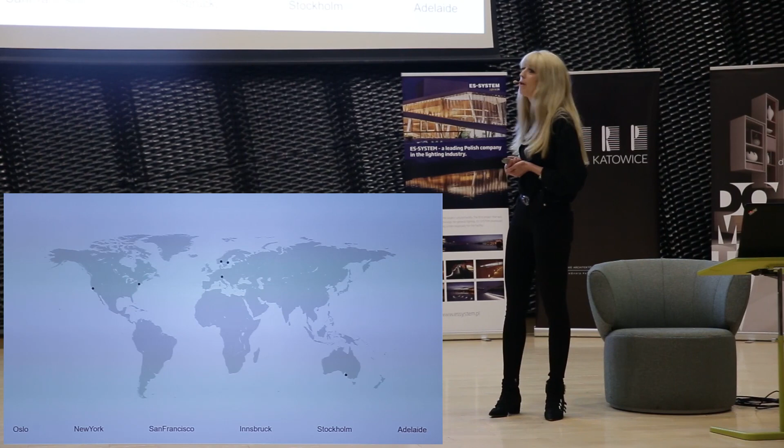Here you see an overview of our offices. It started in Oslo, and then it moved over to New York with a project we won there. I also forgot the Stockholm office - that's a smaller one we also have.

Generosity is a very important part and value within all our work, meaning it also means a lot for our work culture - the sharing of knowledge, not keeping it for ourselves. That's the main force when we work with teams on our projects. This joy of sharing is very important, and hopefully it's reflected within our projects, generating a specific generosity in the built, final result.

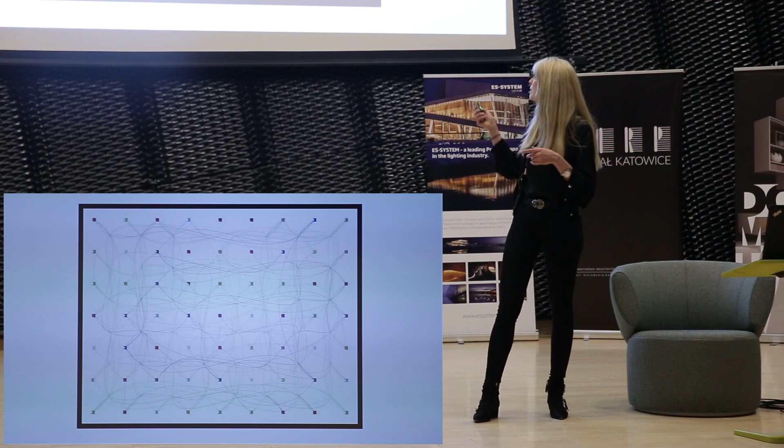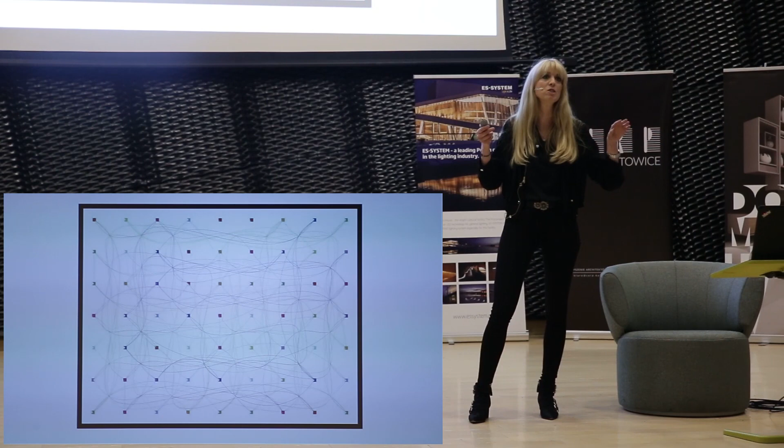This is a classic open floor office. But what we did is not organize ourselves within projects, because we think when different project managers and members are spread within the area, on your way to your next office member - say, if you're part of the 'yellow' project, just as a symbol - you'll get a lot of information on your way to your next project member. That means we maintain a continuous level of shared information within this kind of structural approach.

Transpositioning: within our transdisciplinary approach, we have developed our own work method. It started internally, since we have all the disciplines in-house, and also invited others. It's a method where we encourage each other to leave the profession itself, but bring everything related to your personal interest to the table, communicating the different aspects in a project's development at the very start, sharing this information to bring the whole picture early on, to have this holistic approach.

And to swap professions - we encourage the architect to become a client, the client to become the landscape architect, and so on - to just leave the limited box and the direction of your professional view.

Idea Work, the method of transpositioning—we have kind of rationalized our internal method. We were part of a research project initiated by the Norwegian research facility called Idea Work, where within a series of years we were observed together with other innovative companies, to identify generic drivers within the industry that form a generic framework for innovation. We post-rationalized our method through that research project, and identified specific elements that have to be present for Snøhetta to be at its best, meaning we come into this innovative direction.

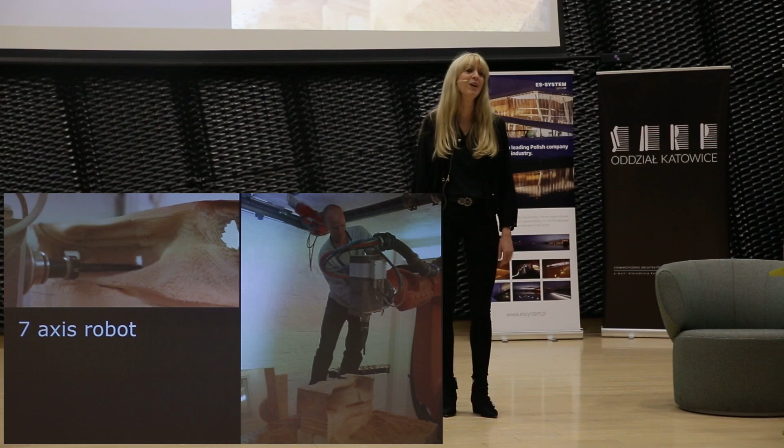We're in the lucky position that we also have this 7-axis robot. We bought it when we actually didn't have the money to buy it, but now we are very happy that we did so.

We were able to summarize our method, processes, people, and the way we work in the exhibition we had at the Danish Architectural Center in 2005, I think it was. We called it People, Process, Projects, because it starts with the people, and the processes generated through the people then lead to the project—the physical result of the former steps.

We also created a small workshop area, a work-in-process space where you were able to have this touch-and-feel experience, looking into several work-in-process situations. And then we have this classical display room where we had a display of all finished and ongoing projects, including models and one-to-one mock-ups.

So how does this generosity aspect lead, how is that reflected in our projects? Of course, the most prominent example for this, I would always say, is the opera. You might have heard about the Opera House, and before I go into the more detailed architectural aspects, I think it's very important to take one step back and reflect on where this approach actually comes from.

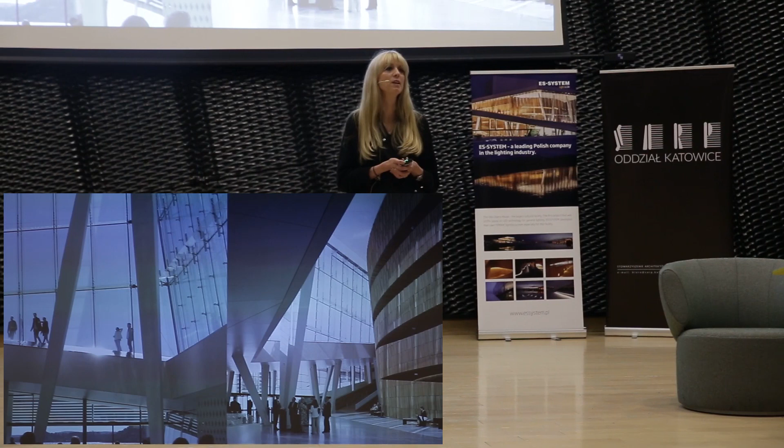So this is actually an interior public space, and this is something we find quite crucial, especially in our climate. If we're talking about public space, it's not enough to talk about outside public space. You see the wooden wall—that's a bit of a transition between the more protected opera performance area and the world, or the city of Oslo.

So we use the reference of the tree—you see the roughness on the outside of the tree, and the more you get into the core of the project, the main performance space, the tree surface gets more and more refined.

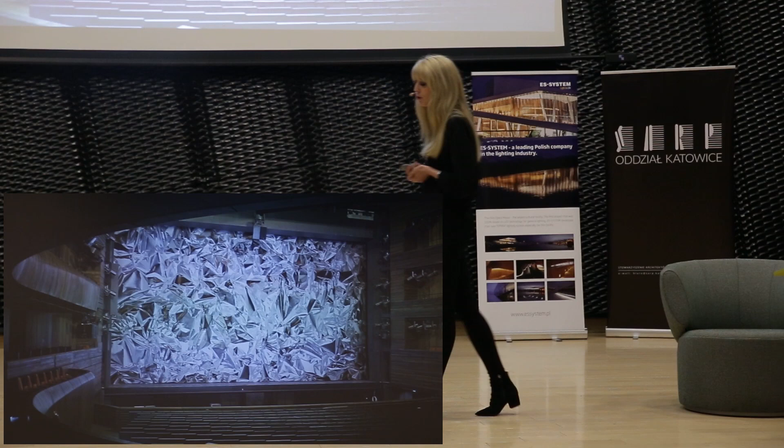This is the main performance hall, called the Store Sal in Norwegian. It has 1,400 seats, and it still has, I think, an unbeaten level of technology—I haven't heard otherwise. The opera was opened in 2008, so I think it's still at the edge of technology and acoustical aspects. The opera also has a lot of art projects integrated.

I don't know how it is in Poland, but in Norway, 1% of all public project budgets goes into art. So the scene carpet was an art project by an artist called Pae, and it looks like aluminum, but it's actually a fabric, a woven structure. The opera roof was also an art project—we actively involved three artists in creating these different surfaces.

And again, it's all about the future generation. I think in terms of accessibility, we also try to include the whole range, and that's more the Norwegian style—that's where we actually come from. And I think the opera is at its best when...

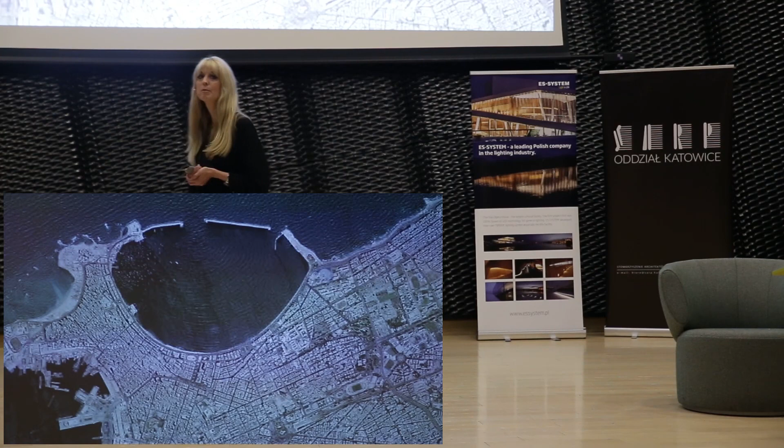A step back in time, I'll take you to Egypt, to Alexandria. This was actually our first project, an open competition that we won at the end of the 80s, for the public library in Alexandria. Funny enough, 80 of the 524 entries were pyramids.

Conceptually, that was a little funny approach, if you think of the Louvre in Paris, where there was something with pyramids at this time. But we tried something completely different, which illustrates our conceptual approach well, because all our projects are born out of site-specific conditions, transferring that into in situ concepts. So our projects are content-driven, not style-driven, which avoids generic formalism.

For the Alexandria Library, it started with a very simple line, a line crossing the horizon. From this simple initial idea, it was easy to evolve further. For our library, this line could also mean the line in time: everything underground has to do with the past, everything above ground is the future, and where the line intersects the horizon, that's the true presence. We used that timeline to allocate the program.

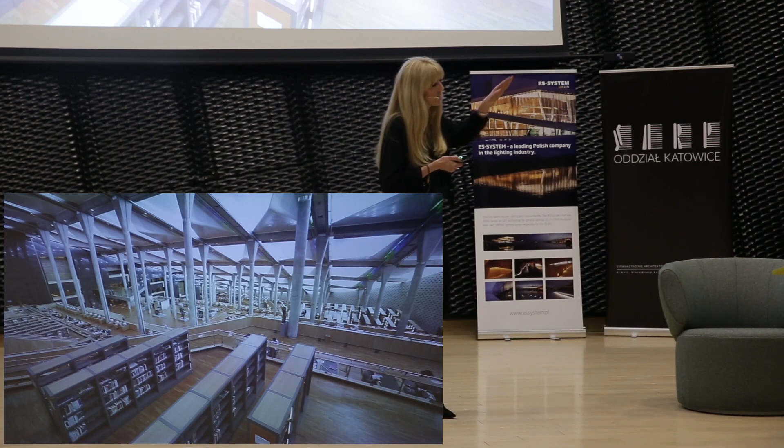Here you see the open reading room, still I think the largest of its kind, around 36,000 square meters, arranged like a vineyard with several terraces underground. Then we had the facade facing Alexandria, the old town.

We worked very actively with artists here. The whole facade represents all the different languages of the world, and we worked with local craftsmanship, combining traditional craftsmanship with high-technology knowledge in a transdisciplinary approach, which led to surprising results.

We were very touched when we got images from the library's director during the Arab Spring, when there was fear the library could be damaged by demonstrations. Instead, people built a human ring around the building. That makes you think that if you put real value and public ownership into a built situation or architecture, it helps maintain that public value and the architecture itself.

This is also reflected in the refurbishment of Times Square, which we did through our New York office, transforming a heavily trafficked situation into a public plaza. We recently started post-occupancy studies, looking at the number of accidents, a kind of post-rationalization. We always have our own research going on, following our projects after we've handed them to clients, especially our public projects.

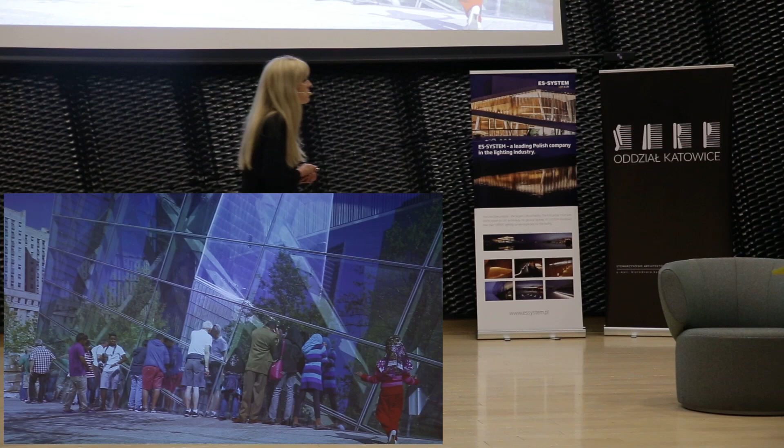What was important for us was to create a situation where everyone could bring their own history to the site, and through self-reflection within the context, link it to their personal history, but also to the history of New Yorkers and the site itself. So we aimed to create a sheltered environment, the only horizontal building in a way, while still allowing for this interaction.

I will show you now a project that we have built in Canada, in Toronto, and I think it's also a very interesting approach in terms of interior public space. It's called the Ryerson University Learning Center in Toronto, and it's basically an informal study center for students.

The reason for this building was that there was a lack of study space in Toronto. All the students lived in very tiny flats, and the study spaces, rehearsal rooms and libraries were very limited. So this building's only purpose is to give students free space for unprogrammed self-study and learning. We tried to use references from a landscape, also within the belief that different physical conditions can create differentiation in learning conditions and behavior.

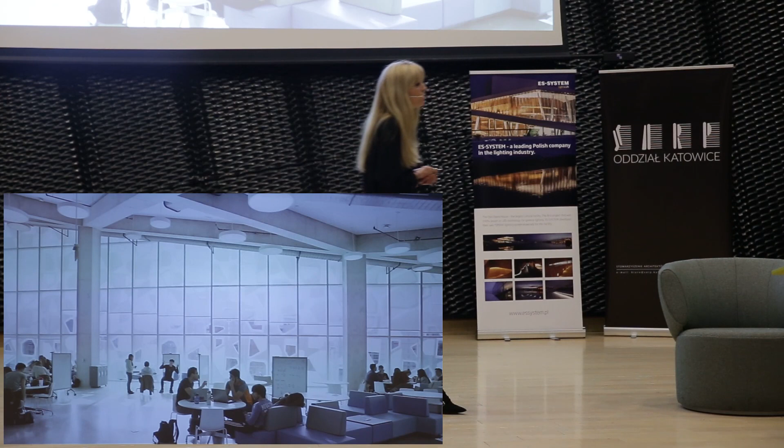If you think about the old Greek spaces, the real exchange of knowledge and cultural development happened within communication with others, nothing that you can just read, you have to experience it yourself. That's what we tried to create this environment for, to base it on that philosophic tradition of exchange.

Another project I want to present in terms of public space, more than on a museum aspect, is the SF MOMA Extension that was completed just a few years ago. The starting point for this project was a building by Mario Botta, an architect who might be well known to you. Our task was to extend the museum with additional exhibition space.

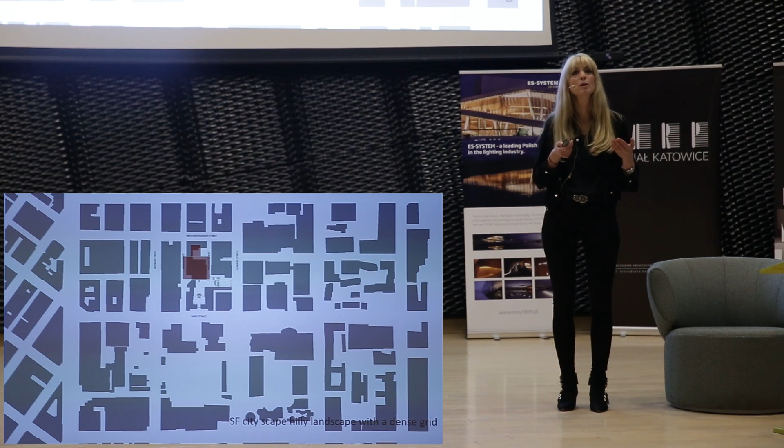But we thought it was also very important to make this new extension increase the accessibility within the urban fabric, because San Francisco has quite unclear directions in a way, and we hoped that our building would help generate another type of accessibility. So we formed it very much based on the urban grid, and created and extended the number of entrance and accessibility points, going more in dialogue with the city context.

We also introduced additional program like free galleries without ticketing, free Wi-Fi, so that it's also included in the public area in a way. So again, the topic of interior public spaces is on our agenda, and we actively address it in all our projects, also to increase the consciousness of our clients in this way.

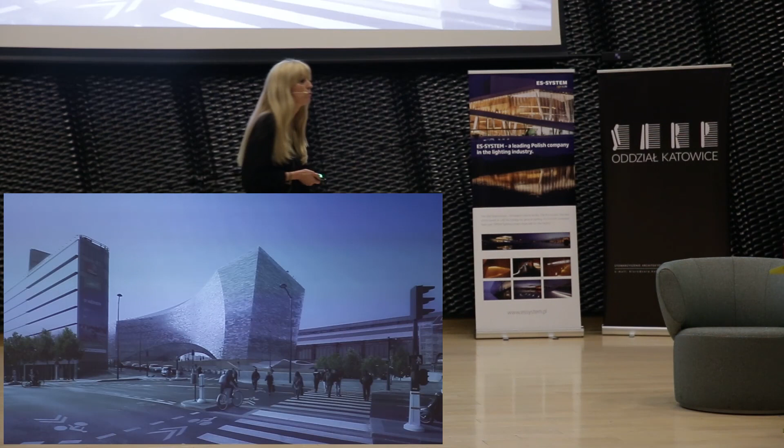Another project we have currently on our drawing table is the new headquarters for Le Monde in Paris. You might know that Le Monde has an outstanding reputation within the world of news. It's maybe the newspaper with the highest reputation, at least in Europe.

That was an invited competition that we won. Our basic approach was to create a bridge for this site, because originally the project, or the site, was divided in two, and the regulation only allowed for two independent situations. But we thought it was very important to create an architecture that also had a symbolic effect, like Le Monde and the building as a bridge between Le Monde and the world.

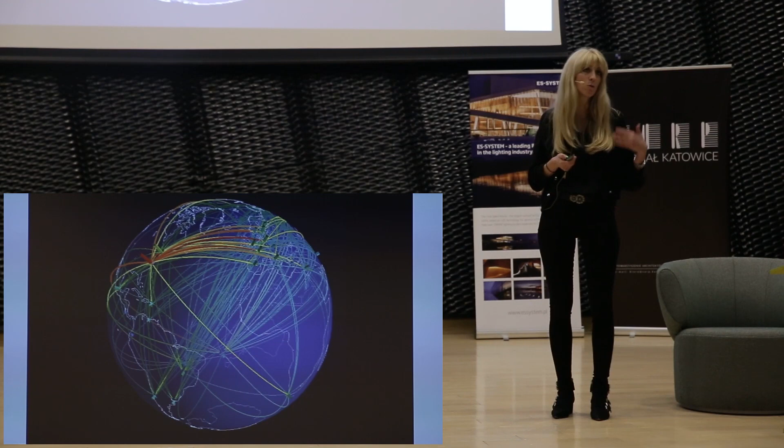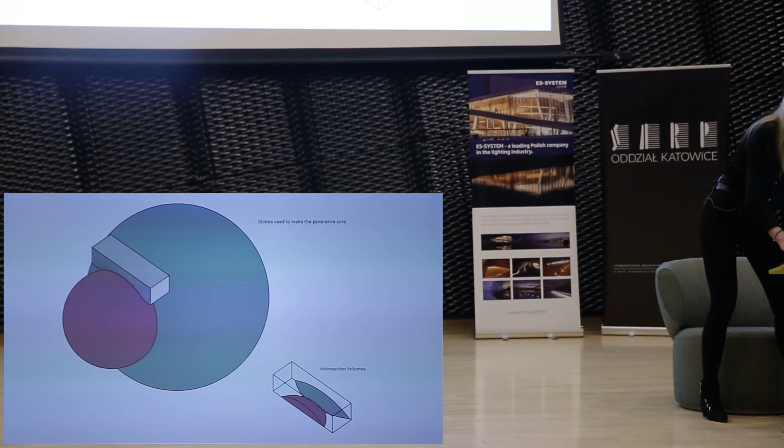So we used this kind of metaphor actively when we worked with the site. I need a little water, but I can speak while filling it.

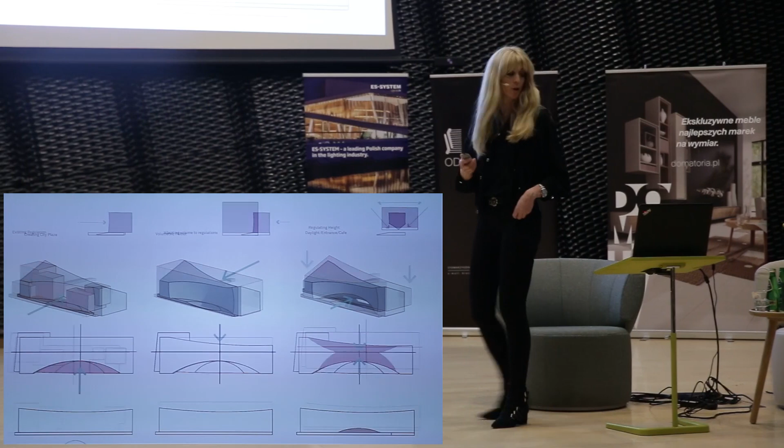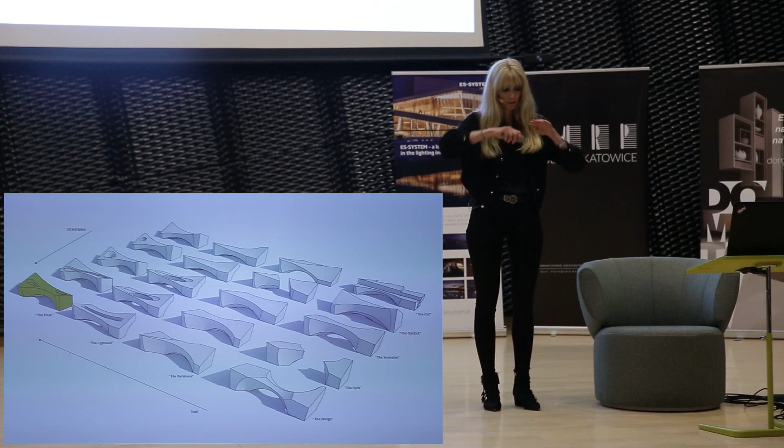We showed, within a series of interventions, that by relocating masses, we create in a way the same volume, but managed to create this bridging effect. That's also reflected within the materiality of the building. We wanted to create this pixelated effect, like the kind of news and the level and complexity of information that Le Monde also represents. You can see it here from the plan.

As you can see here, it has two kinds of entrance situations. And also, we introduced here some public interior program, like a gallery space and an information center.

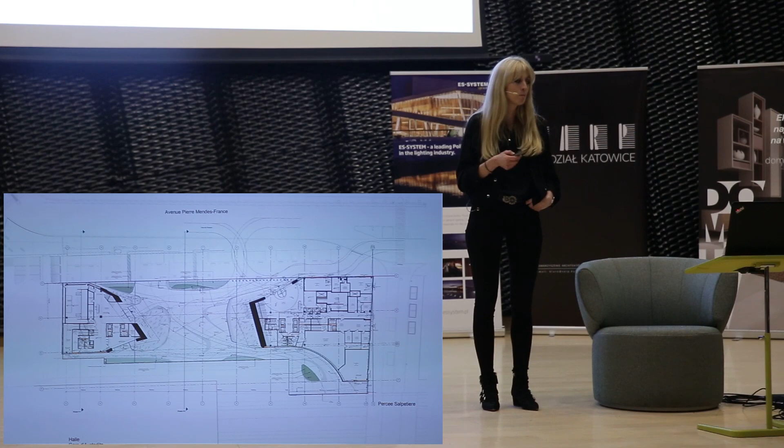Le Monde was really brave because of the situation in France that you all know about, where they could have increased their level of security. But they stuck to their original concept to allow us to have this vulnerable program on the ground level, which allowed people to go into the building, but also increased the potential of attack. Still, we were able to develop and refine the program as we had proposed, and that was also one of the reasons why we won the competition.

So you can see here the stomach, this kind of bridging, the materiality where we have a light installation that we can program, which also has something to do with the news and the speed of information. And here I brought you a facade section, because it's actually a very simple facade solution.

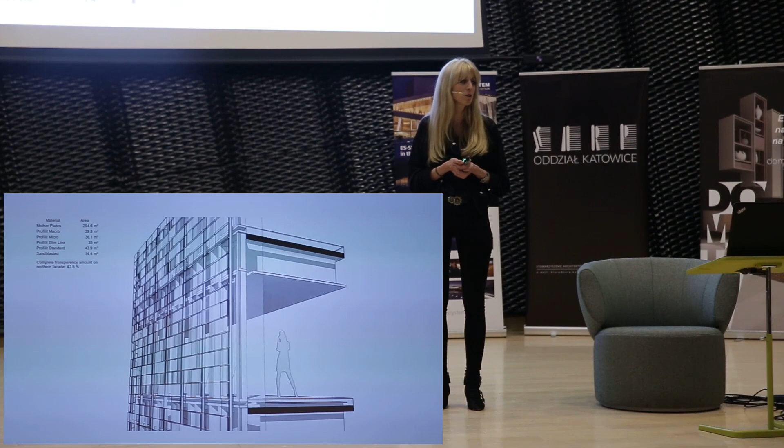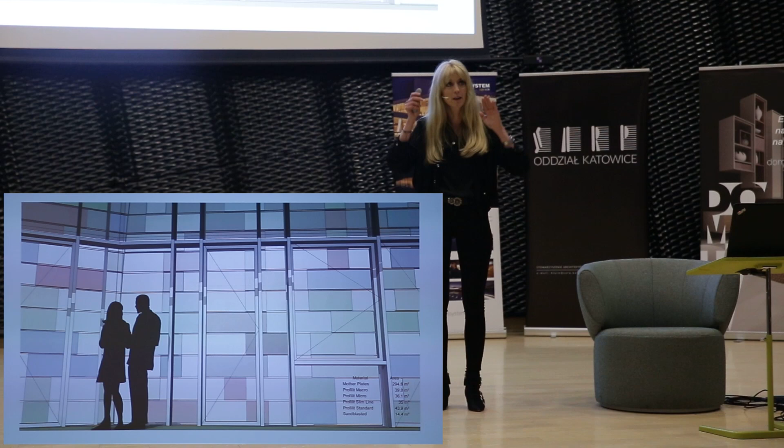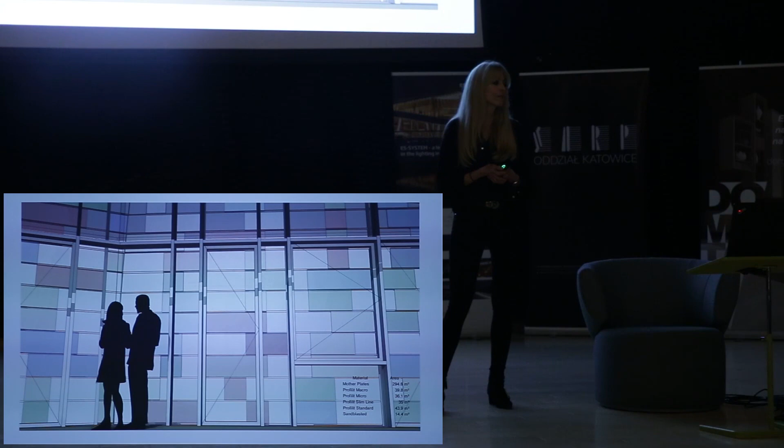We worked with different layers of glass and transparency on a very basic structural approach, with a series of repetitive formats in a way, but it still required quite some high technical skills in terms of modeling, including 3D modeling. So here you see some images of the public situation, the entrance.

Rapid prototyping. As I introduced to you in the very beginning, the workshop method is very important for us when we develop form in our projects.

So I will show you one project that we were commissioned to do for the Reindeer Association in Norway. We are again at the mountain Snøhetta. The task was to create a small observation pavilion to be able to observe wildlife.

Very basic commission. So these are the kinds of objects that we are looking at, and it also brings us back to our area where we have our annual conversation.

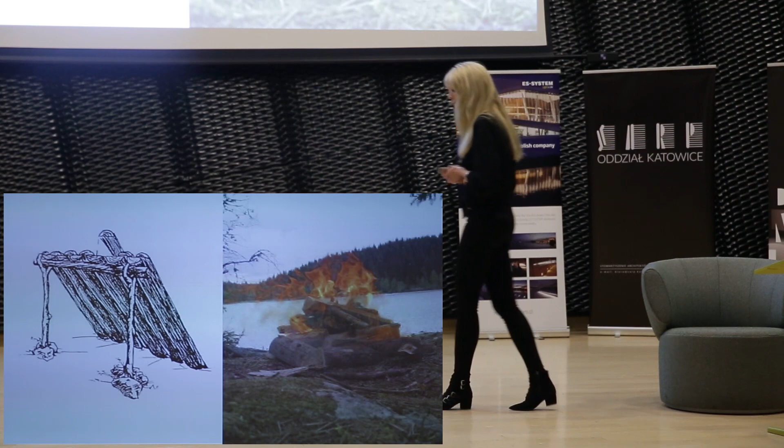When we go into a task like this, we always carefully make an analysis of the local context. What are the typical materials? What is the topography? What are the cultural and political aspects of a site? Here it was very clear for us that we have to work with how humans inhabit nature.

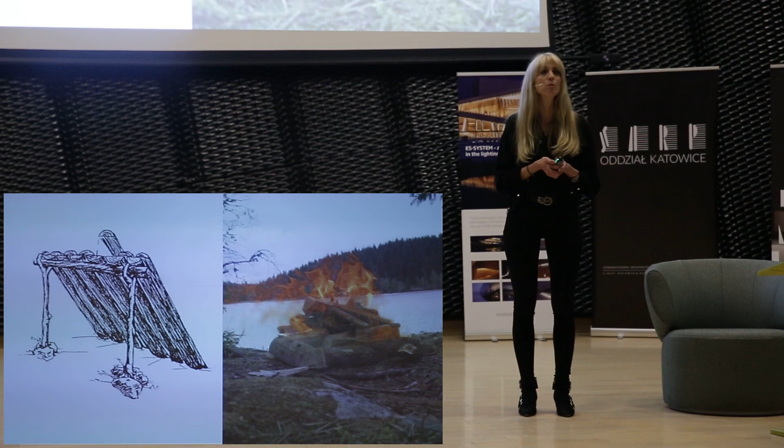This is a small gapahuk that you can see on the left. It's a shelter for hunting in Norway, a very, very old, simple structure, and then of course the bonfire.

So we have this kind of long-standing and preferred collaborations, and then the interior was shipped on a truck and installed on site.

We call this building, and a whole series like it, keyless structures, because it's basically a public building. It's open 24 hours, and you can go there with your family and friends, and even stay overnight. No one will throw you out.

As Snøhetta, we also gather there before we go to the mountain, having a small conversation. So I think this also reflects very well the way we work.

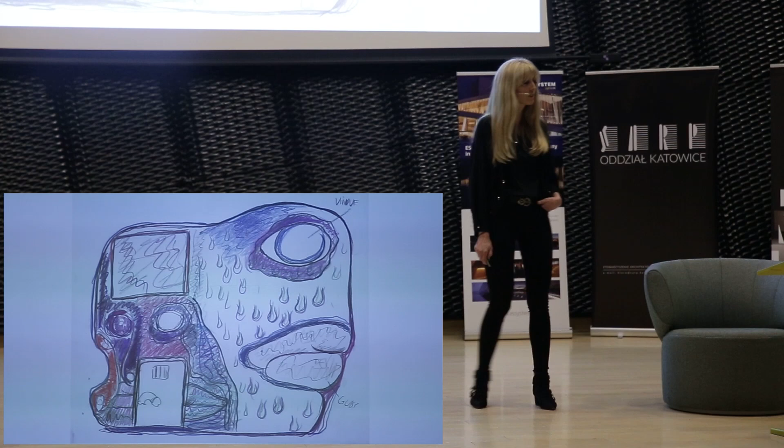Together with him, we got the task of creating a so-called house to die in - a single family house for this artist. The process was very interesting because we worked very closely together with him, and you can see here some of his sketches.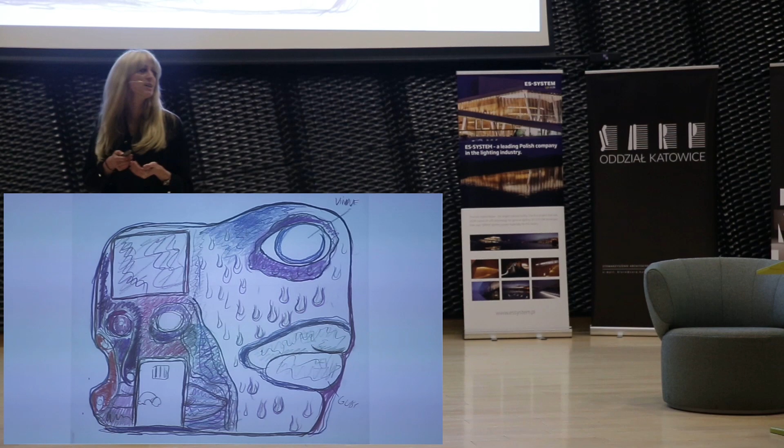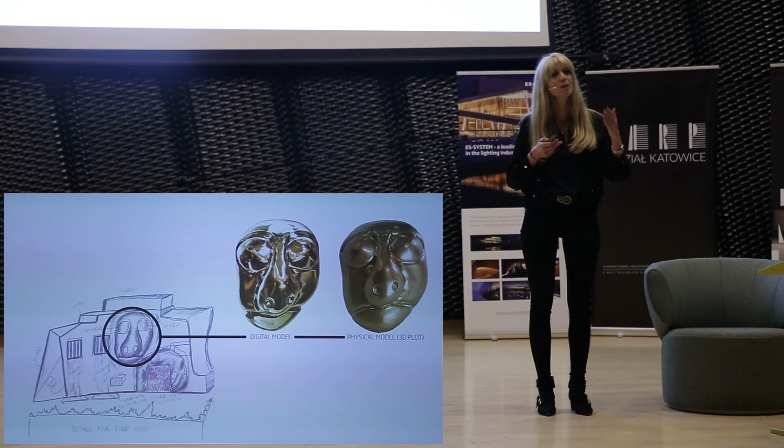And we tried to transfer these sketches, and that's also reflected in the way he works, to try to transform it into a three-dimensional space. So it was much about scanning and also modeling. This very literal co-creation process also led to a very unconventional result.

So this is actually what it will look like. And of course it has created a lot of discussion in Oslo, because this site is very close to the former atelier of the famous Norwegian artist Edvard Munch. Strangely enough, within that area there are a lot of artists living, so they raised really protest campaigns against this building.

This discussion has been ongoing for years, but we are quite optimistic that we will manage to realize this building. It's an experiment, of course, but it's at the edge of a kind of collaboration process in a way.

So here you can see our way of experimenting with the facade. We used an old Japanese tradition to burn the outer layer of the wood, because that gives you weather protection. And we were also able to exhibit a one-to-one mock-up at the ICA in London with an exhibition of the process. So also a very interesting, very baroque approach in a way.

Knowledge-based intuition - that's a very important one of our creative drivers, and we encourage ourselves to constantly rethink and redevelop our method. I will show you this with an example that we developed after we won an invited competition in 2007 for the King Abdulaziz Center for World Culture.

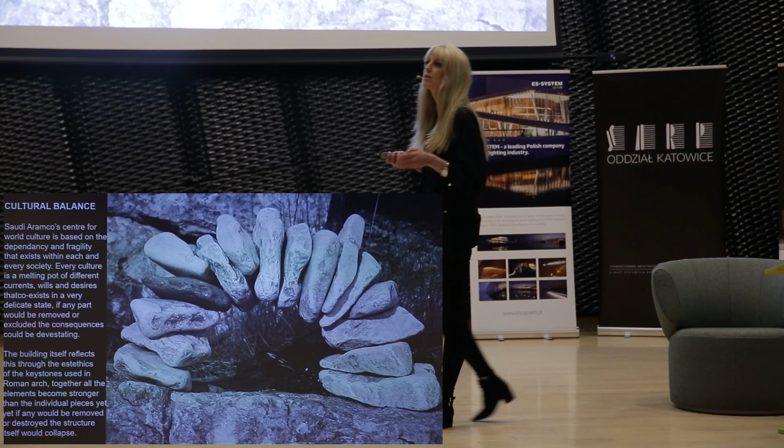Our entrance and conceptual approach for this project was to think about it as a kind of composition of elements that are dependent on each other, to show that culture has this interactive approach - like a Roman arch, where you can't remove one of the stones because then the whole composition will fall apart. That's also kind of how we see culture, as the keystone in society, and that's where we located one part of the program.

As you can see here, the core of the project was the keystone, and at first we had the children's center there because that has something to do with the future. We also used the timeline - past, present, future - for this project, and that has to do with the programming. So we took everything that has to do with history and museum underground, and the educational parts were located at the highest point of the building.

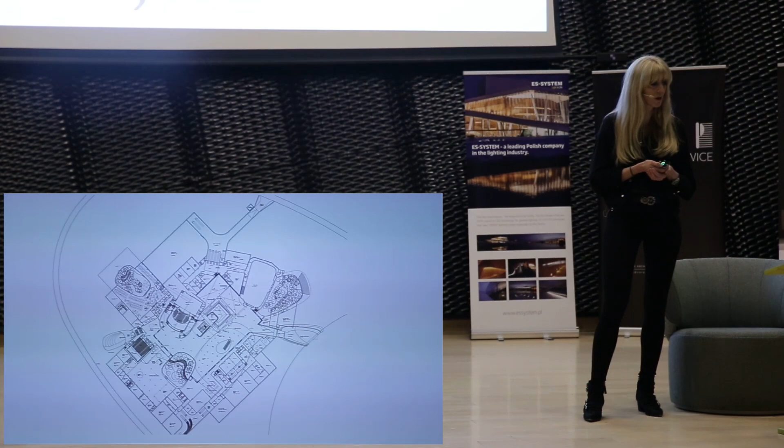So here you see the rendering from the composition and a bit of the build-up of the project from outside. And here you see the ground floor - it's a super complex program. What we created here was a kind of interior plaza where we had the entrances for the different cultural programs, like the auditorium, library, museum, and so on.

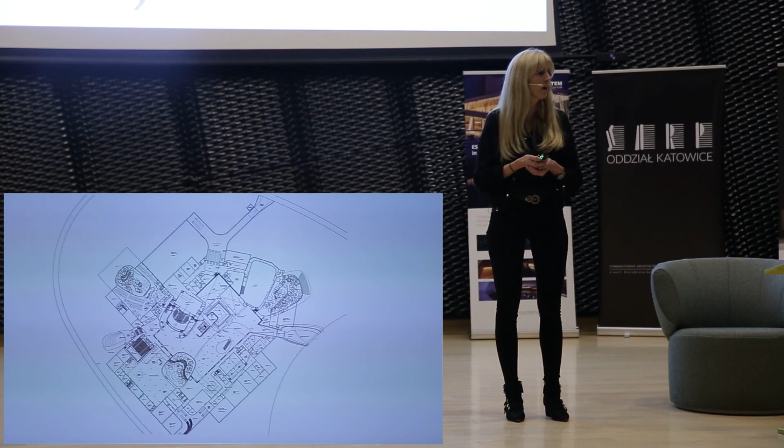This image shows very well how, when you have a strong initial concept, it's so easy - or not so easy - but there's a certain logic within it, when you agree upon a concept, for how you can refine and develop the different layers of an architecture. So here was a discussion about the facade, and we started with the keystones, then made an analysis of how the lines run around the stone, and that led us to a very natural flow of how we developed the facade.

And here you see the one-to-one mock-up. It's actually steel pipes that are mounted around the different volumes, with a 5 centimeter diameter. We also had a mock-up in front of our own office, just to experience the physical presence of that solution.

A lot of these programs also do not require daylight, so in situations where we wanted daylight, we just squeezed the pipes so they had a kind of flattened diameter, and then they transitioned again to a circular format. So here you see it from the building side.

That project was really an adventure. I was also part of that, and I haven't ever, and maybe will not ever, experience a project like that. It was a fantastic journey, together with the client, sticking to the original concept and being true to the agreements made along the path.

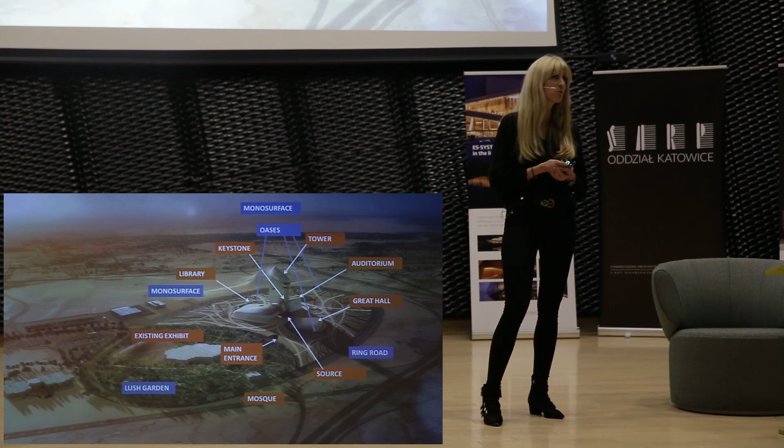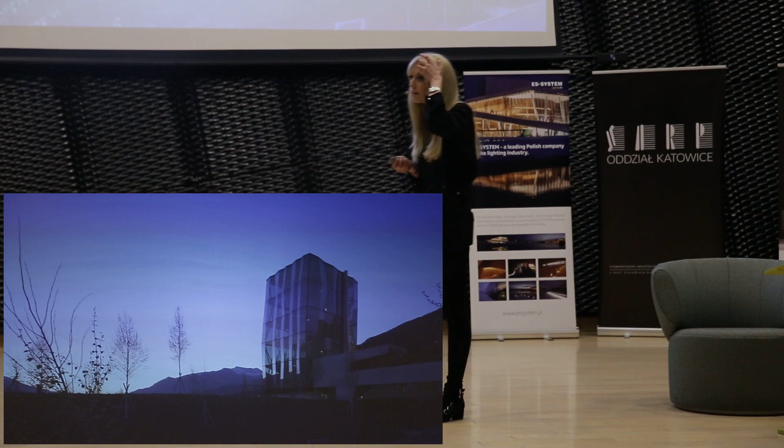So here you see it as it was, and also I think what's important when you have a very strong concept, and you put knowledge and energy into developing this very important phase, that's reflected in most of our projects. The built result is very similar to the conceptual or competition proposal, the very first conceptual design. Another project we built in Austria was also the start for our office in Innsbruck.

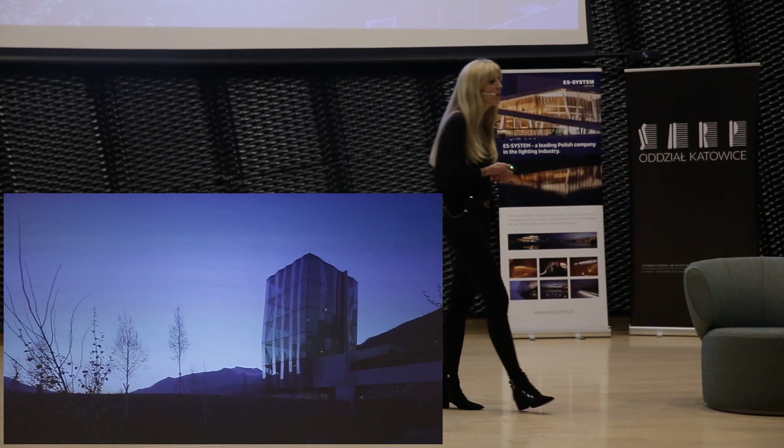They are about 30 people now there. That was part of the Swarovski area, and it is a vertical play tower, so there was a little bit of experimenting with the field, an indoor-outdoor situation for children. We work very closely with Swarovski.

You might know these small crystallines - they have this jewelry, but also these crystalline small animals and stuff. So we worked very closely with them to create a pattern and a frit, and also for the interior, looked at the surroundings and used the colors of the surrounding nature as a basis for our interior development, also having a customized approach within a typology that didn't exist before.

We also had to go through all the regulation - in Germany and Austria you have this TÜV and all the stamps in terms of security, but we managed to go through all these stages as well. And it also has a nice cafe situation and so on.

The continuous state of reinvention that we put ourselves in - you could say it's a little bit of being in a constant process, that we're not reproducing our ideas, but it also means you have to always ask yourself and reflect very carefully if you're on the right path, and also stick to your method.

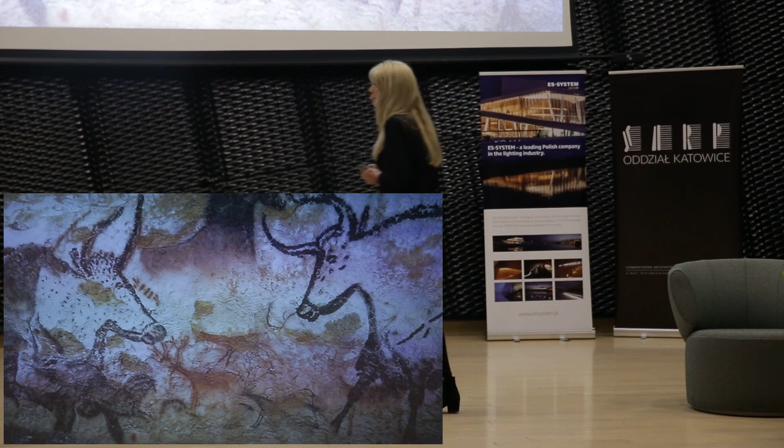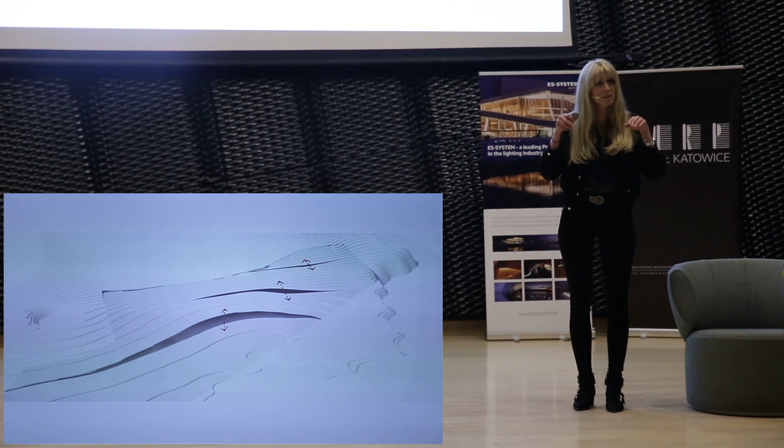In the end of the 80s, one made the decision that there should be a visitor center, and it took some decades before that was put into action, but it resulted in a competition that we won. We tried very carefully, because there was a lot of program - it's about caves, it's underground, so how do you deal with the situation? We tried to create an approach where we only made small incisions within the landscape, so it's more building landscape than architecture in a way.

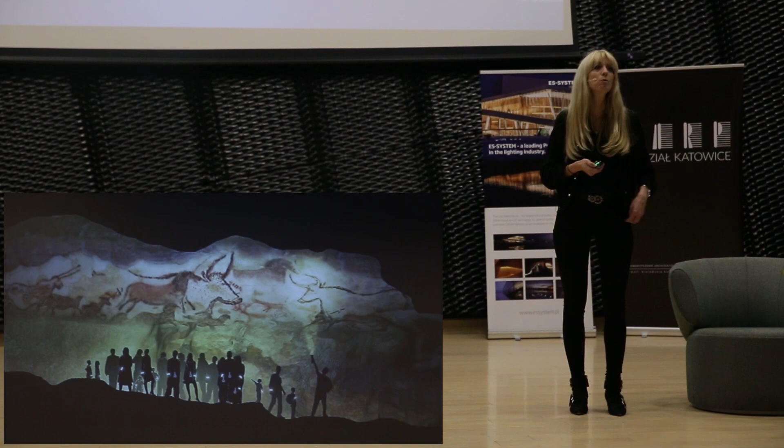So here you see some of the competition renderings, because a very interesting part of the program was a replica of the existing cave. That required a process that is really unbelievable - it was the total scanning of the existing cave and then reproducing it to an accessible part of the visitor center, to really experience one-to-one how it is to be in a cave. So we created different sequences - this is still from the competition, so it's also part of a digital display.

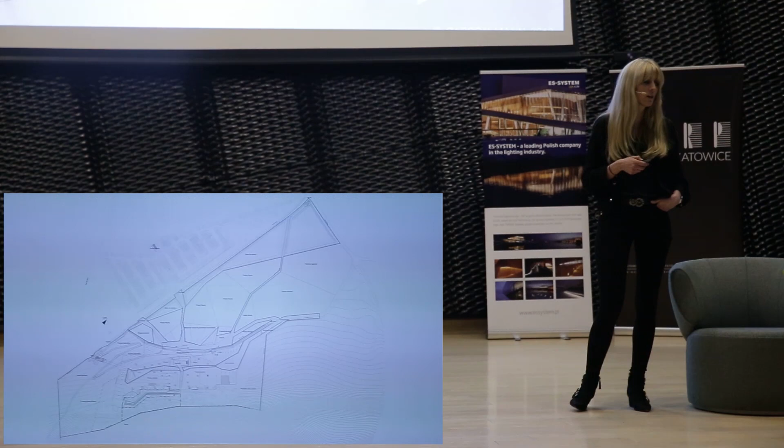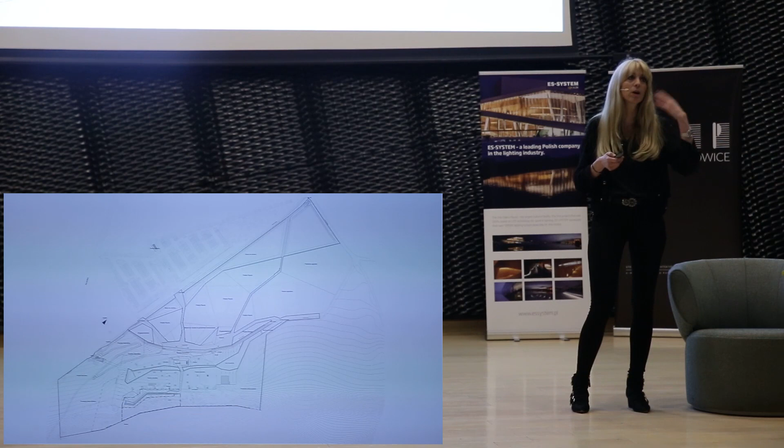So it's actually a kind of path where one is to go through this replica of a cave, and then there are some display areas where you learn about history, and some breakout zones.

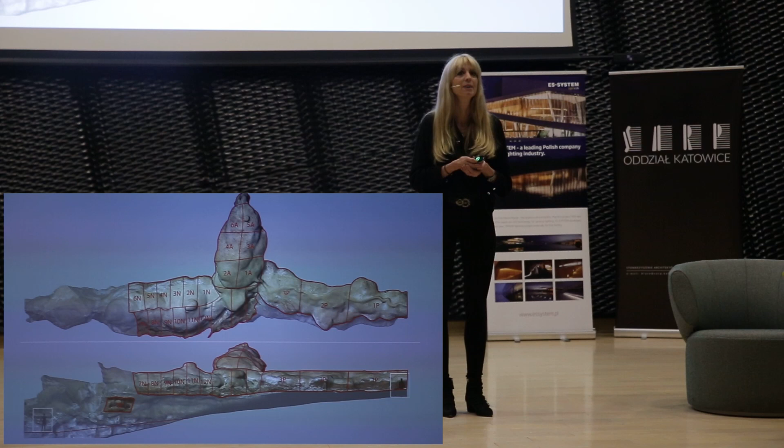Here you see a digital section of the project, and the complexity of the reproduced geometry. That also required from our side, I'm really admiring these digital skills, transferring it to a buildable architecture, because that had to be reproduced.

So you see here the quite complex build-up of how it was constructed. One funny thing was that we also had to adapt it to building regulations, making it accessible. At some situations the caves were very narrow, so we had to widen them up to the minimum required by building regulations.

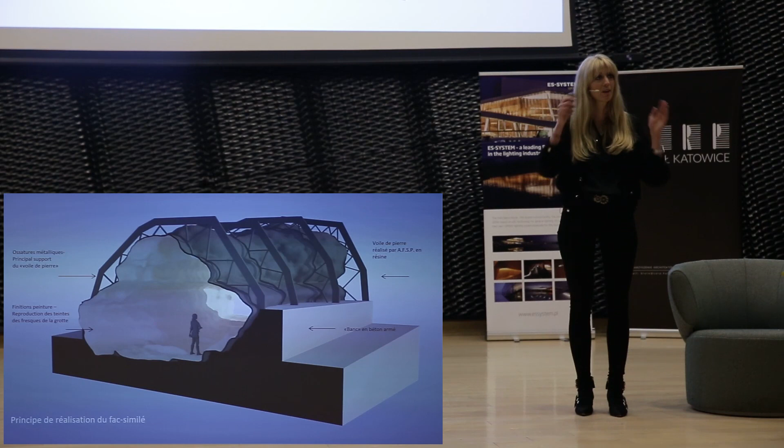So this kind of negotiation between the original cave and adapting it to contemporary requirements, that was a very interesting development.

And here you see it from the outside, a super complex kind of building. It took a long time to build it in very small stages, and contemporary artists were also involved to recreate the paintings in the interior.

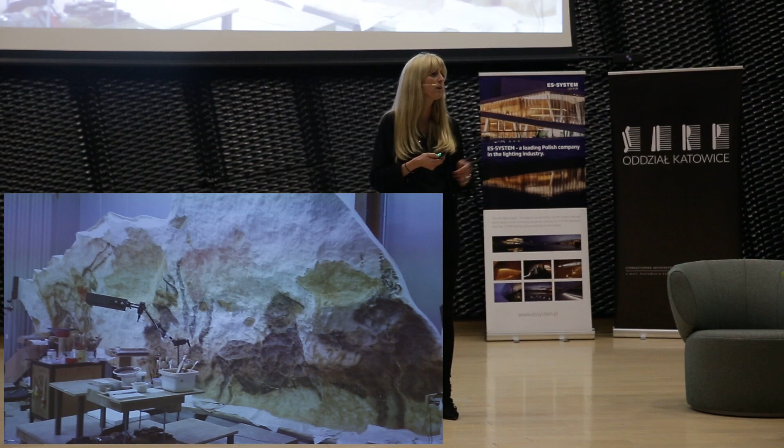What is really interesting is that through the very thorough process of scanning the existing cave, one discovered layers that were not accessible before doing that process. So in a way, we also discovered new layers of history within that construction. Here you see some images of the final result.

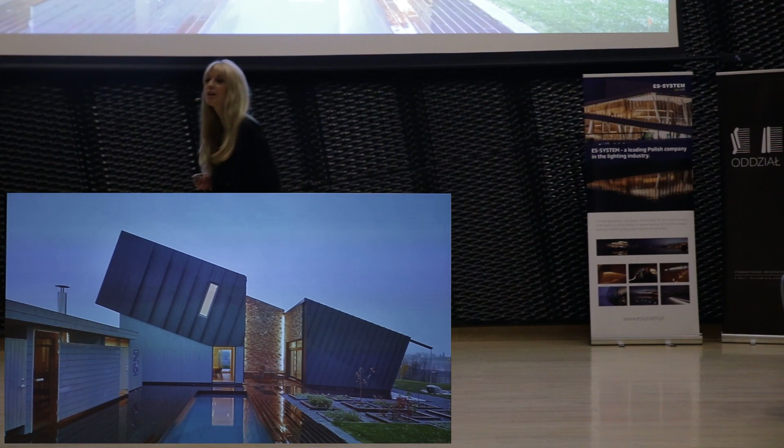That's a big jump now back to the Scandinavian context. We have several alliances within the building industry where we actively try to look into the possibility to develop plus energy houses. This is a cooperation - a single family house we developed together with contributors from the building industry, with a very high ambition level, meaning this is a plus energy building. But what's very important is that we also compensate for all the embodied energy located in the materials within the building. That's a quite different approach to more traditional plus energy houses that only focus on producing energy, not taking responsibility for the whole life cycle. So it's a very basic approach, integrating passive and active measures.

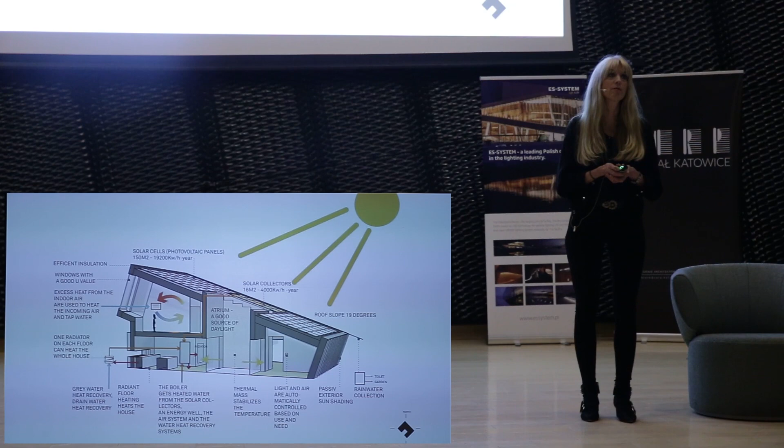What I think is very important is that we work with recycled materials. What you see here is the brick - I know there's also a theme here in this area - but we work with recycled material from an old barn that we managed to introduce into this project.

Snøhetta is also part of an alliance called the Powerhouse Alliance. Here we are together with other contributors from the building industry developing plus energy houses with a very strong definition, meaning we also compensate for all the embodied energy within a building within a 60-year lifespan. That's quite ambitious, because you have to include elements you have to exchange - like a window has a shorter lifespan, for example, and you have to change it several times within the calculation of 60 years.

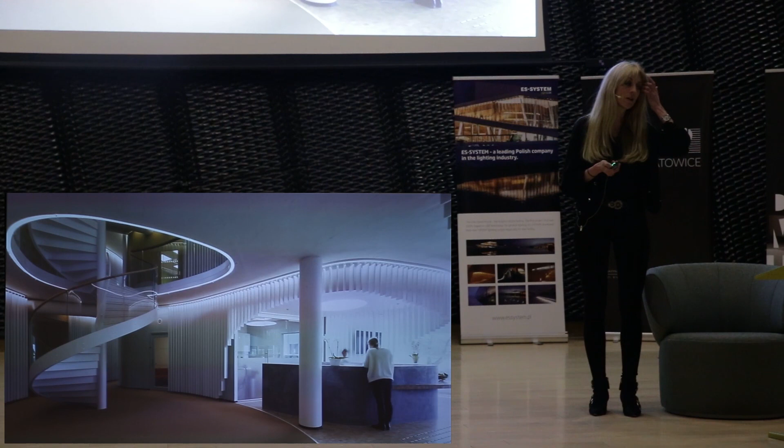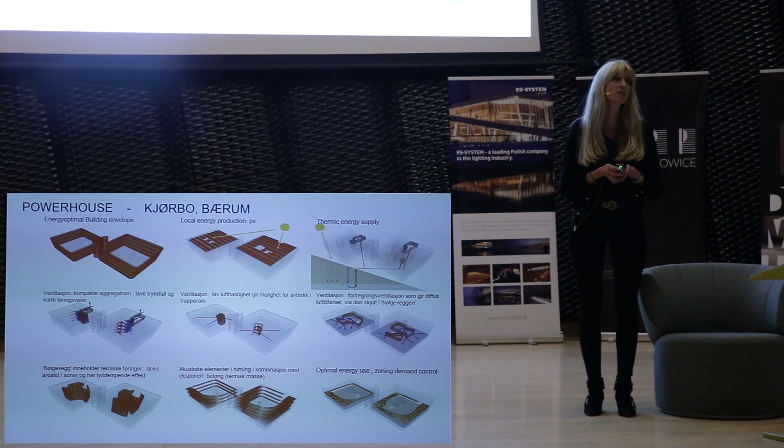The first project we actually realized was a refurbishment project, a very ordinary office building from the 80s. We had some restrictions in terms of building regulation, change of facades, and so on. I'll briefly show you how we dealt with this refurbishment and sustainability topics. It was before a very traditional office situation, and here's how we managed to implement our sustainable approach while also changing the inner soul of the project. Here you see an overview - it's more a collection of passive and active measures, enabling these houses to go into plus energy within this wide lifespan.

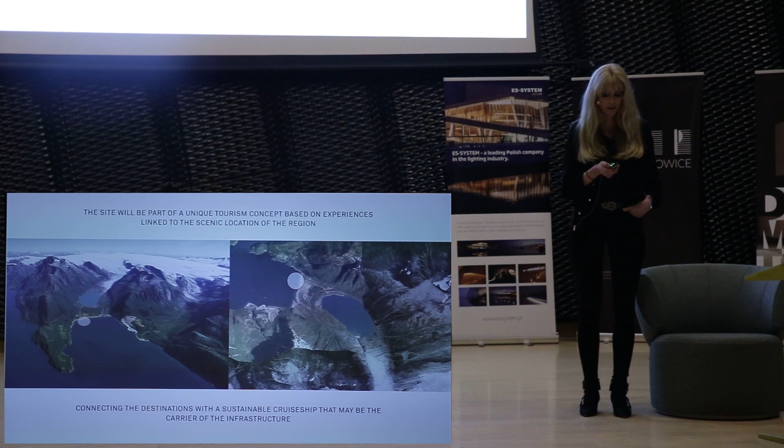We have other developments like this new office building going on within the same alliance, just to show that our work is also trying to embrace that part. The very fresh project, directly taken from the drawing board, is that we're also developing a hotel project within the same alliance model, a so-called Powerhouse Resort in the north of Norway. I'll briefly show you some parts of the concept.

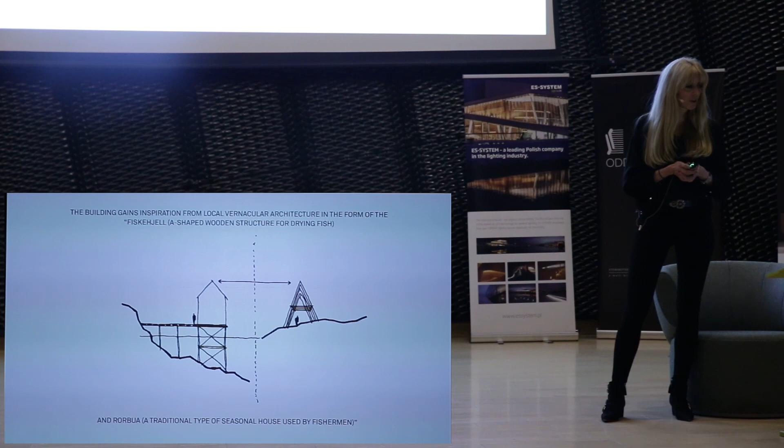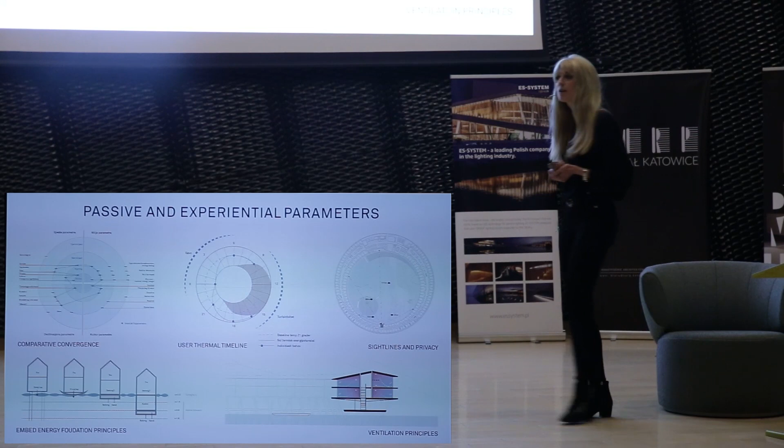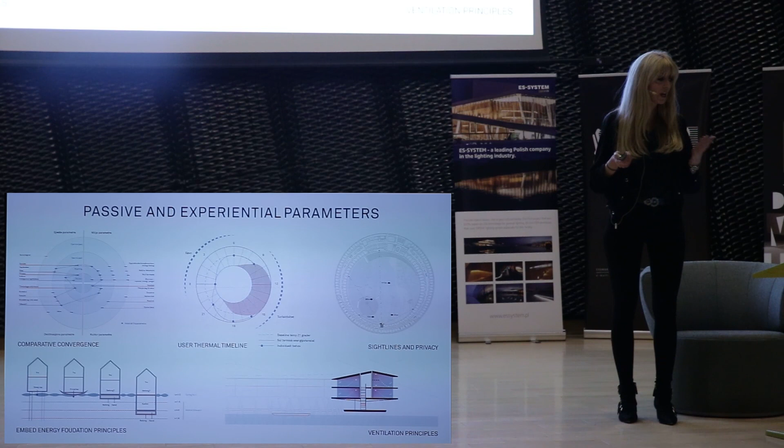What's very important, and that's why I show this slide with the more technical diagrams, is that it always has to do with passive and active measures. For a hotel, for example, you have to deep dive into user behavior, and look into what type of foundations we're choosing, because that has an impact on the overall sustainability calculation - and that gives you completely different guidelines for developing architecture.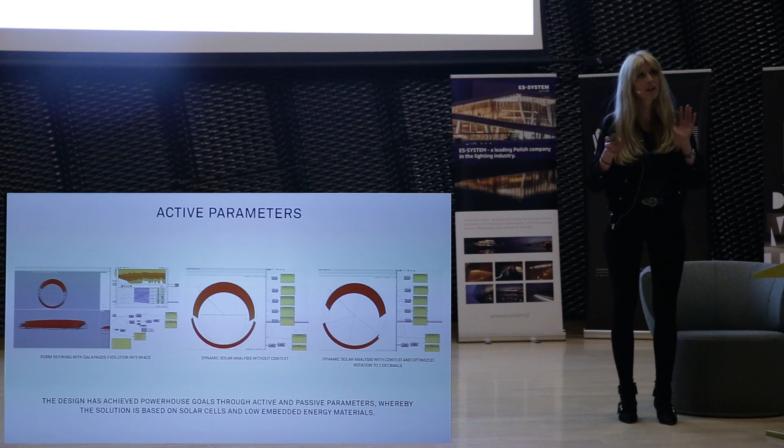We call it form follows environment. And also we use active parameters when we measure the solar harvesting possibilities. And that also guides us to an active shaping of the roof according to the sun direction and measurements.

I'll show you a plan for this hotel. It's about 10,000 square meters. It's a lot about the outdoor experience you'll have in this location, and also means of transport will be quite important so that we don't increase traffic. So the ferry that transports tourists to that remote location will have a carbon neutral energy source. So form follows environment in a wider sense.

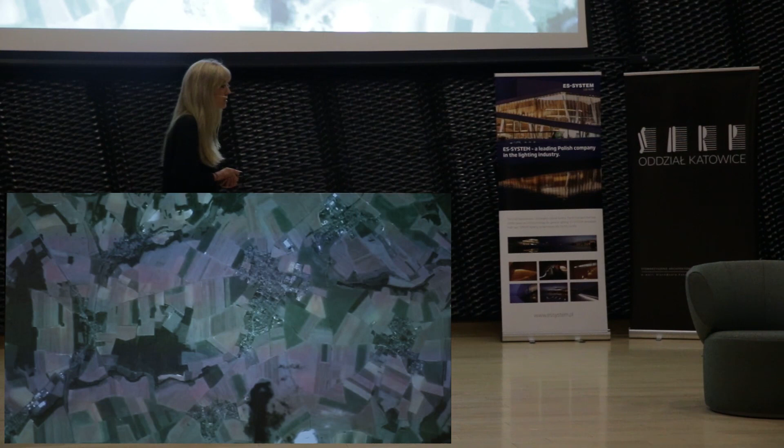We have been engaged in a large urban or suburban development close to Paris, near the Charles de Gaulle airport. I'll show you a bit how we upscale that method or approach when we have to embrace such a huge program. That was an urban development about 200,000 square meters, a mixed-use program.

What we did also, since we wanted to preserve the farmland - we have one mantra at our office that we never build on farmland - so how do we deal with that aspect? We tried actually a little bit the same as we did with the opera. We included the farmland on top of the building, so that within our vision of a project of that size, we're able to enhance the local agriculture. We grow it, you smell it, and also have this local food production as part of the development.

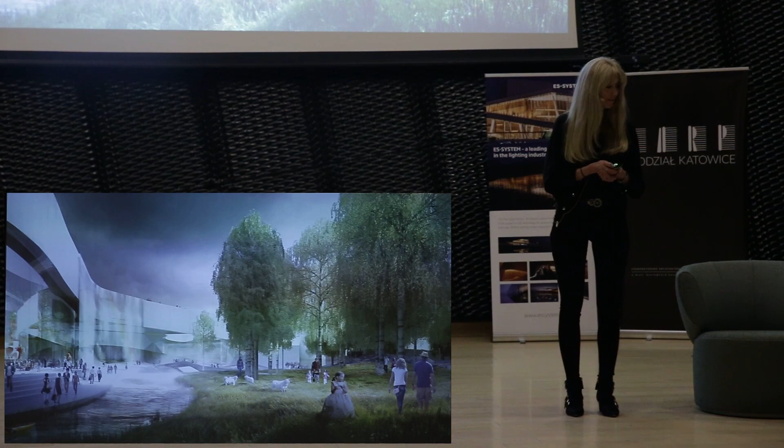This project, we didn't win in the end, and to be honest, I think it's okay that we didn't, because it also had an indoor ski ramp, so one could be a little doubting about really the sustainability part when you have to include programs that are not really feasible within that climate zone. But again, this is form follows environment.

If you transfer it to other contexts, I'll show you a series of smaller interventions. This was an art project we did with a photographer in Sweden. The basic approach was to frame beautiful views in a landscape together with the photographer's eye. He was selecting the motifs, and we followed with small landscape interventions, framing the views he had picked. That was a very interesting approach, and a direct reference where form follows environment, because the views were kind of guided for us.

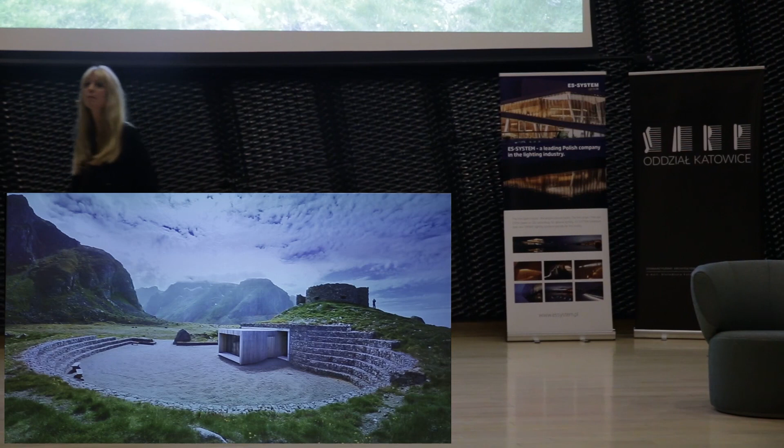I don't know if you've heard about this series of projects. In Norway, we have a state-funded program called the Nasjonale Turistveger, the National Touristic Roads. That was a program rolled out quite some years ago, meaning that the beauty of the nature was demonstrated with small architectural interventions along the national roads through Norway. Norway is a very narrow but long country, so we have quite some distances in remote locations.

We were one of the first generations of architects that designed these small resting places, like this one in Lofoten in the north of Norway. These were small architectural interventions, state-funded competitions. Now I think we already have the fourth generation of architects, also allowing young architects to do projects of that kind, which is not always so easy. This is in Eggum.

Another project with the same kind of contextual reference was a small hunting lodge we built for a photographer, located so remotely in the Norwegian mountains that all the materials had to be brought to the site by horse. This lodge allows for occupancy of about 15 people, so it's mainly about putting up a tent in nature, but transferred to the cottage category. Here you see it's almost blending into the nature.

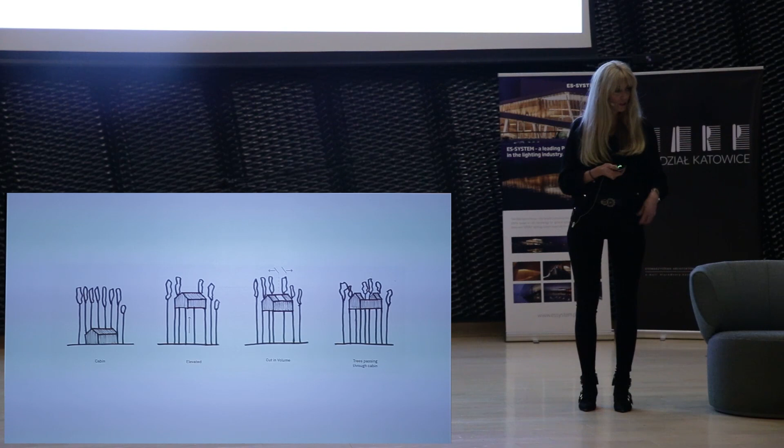Another example of that kind of typology is a very young, fresh project, opened last year - I don't know if you've heard about the tree hotels in Sweden. It's a private hotel with a concept based on small cottages with very bold architectural expressions, and each of these cottages had a different architectural - I don't want to use the word style, but since they give different projects to different architects, that creates a variety of expressions. So we tried, in a very simple approach, to solve that task.

So we started with a very classic typology, a cabin, and since the task was to work with the tree dimension, we just lifted it up into the air. You see it here as you approach the forest, the nice pine forest.

And the closer you come to the cabin, it's very much also about the fifth facade, which is here. We have mounted an installation, a print of trees, already guiding you up to the theme. It's a print that has basically sky and trees reflected on the underside of the building.

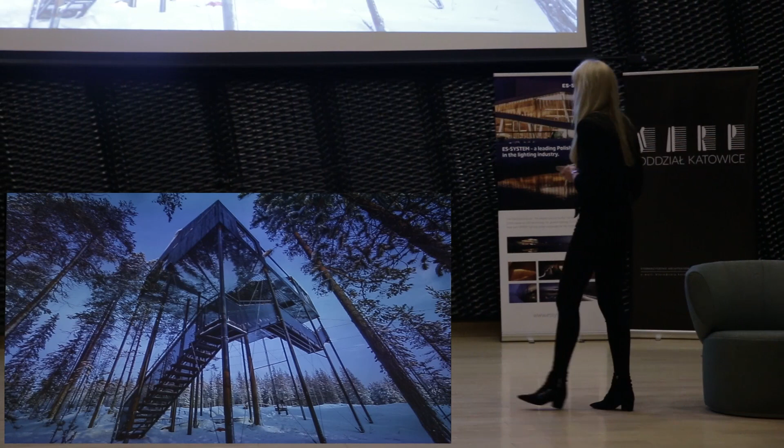So here you see it from the more northern light perspective. That's also a good example of how we work with classic typologies and then give it our own notion by rewriting the story in a way.

And we are staying in Norway, in the Lofoten area - oh, now we went to Sweden, but we were in Norway, now going back to Norway. We'll show you a small intervention. It's also a hotel project, but also to show you how the different contents and different contextual situations lead to these site-specific answers and architectures that we create.

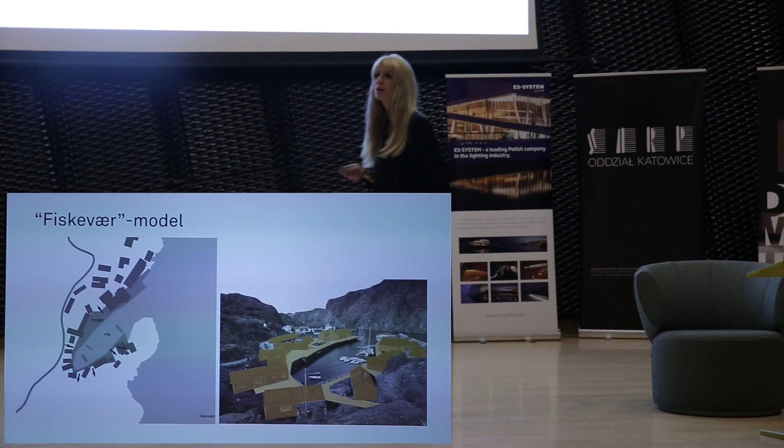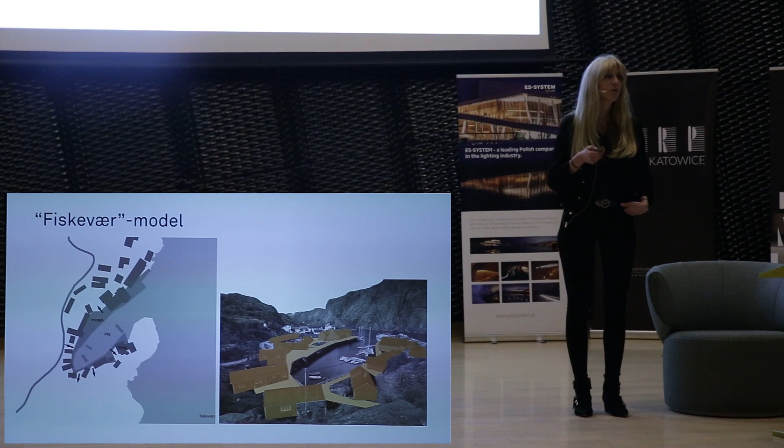So this is the site. It's very close to the shoreline. For this project, we looked very carefully into the local building tradition, how the organizational model of fishermen inhabiting the small fjords and bays protects themselves from the harsh climate conditions. We also looked at how animals inhabit nature, and what kind of contextualized site-specific traces you find within that context.

From this analytic approach, we created a very site-specific language that solved that - that was our answer for this site. It's also a hotel and it's a work in progress, but I think it dealt well with this context, which is more nature than architecture. Should one really place architecture in that part of nature and landscape? So it's about dealing with the nuances of this.

And I will finalize today by showing you a project that is not built but now under construction. That's actually a project that had an explosion in social media. We got a commission for an underwater restaurant at the tip of southern Norway. It's really a challenging task because we had never dealt with that kind of program before, and it was a very confident client that gave us this task.

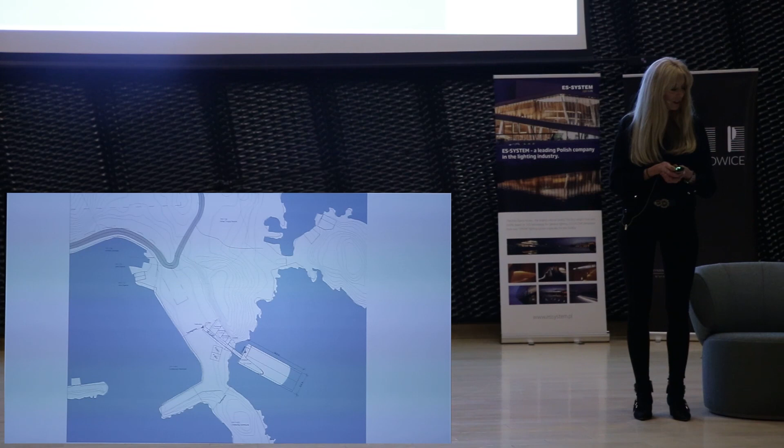So this is the site - you can see here it's a beautiful harbor view. This is the location. What's also very interesting about this project is that for some years we have also had a brand design department within Snøhetta. So for some projects we have the possibility to also work with the identity and communication part, and with this project we actively had our brand design department on board from the very beginning.

When we developed the identity of the project, we very quickly came to the name 'Under' for this restaurant. In Norwegian, 'under' also means 'wonder' - so playing with the name leads to the identity of the project, which is also part of our visual identity and brand design work.

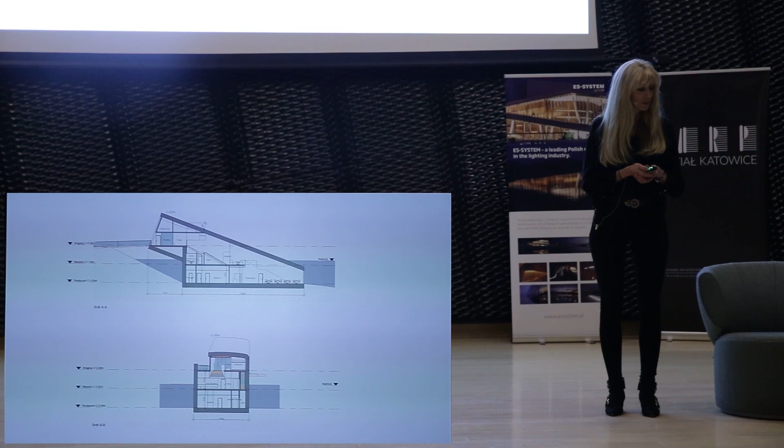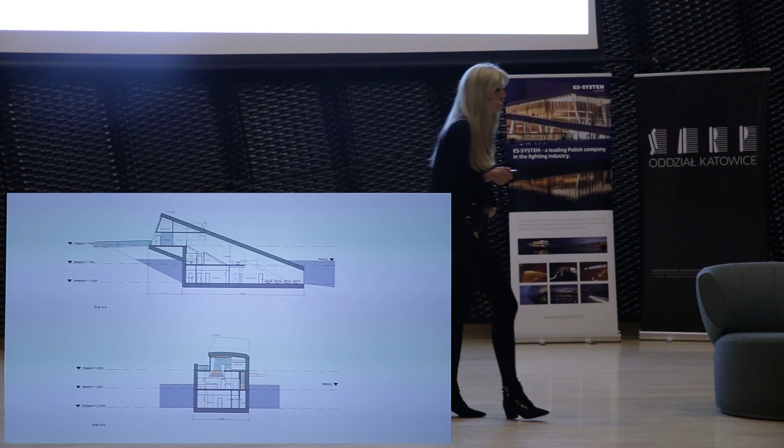So I'll show you here some sections. What's also interesting about that project is that we will also use it for maritime research - how underwater life reacts to that kind of building - and also develop a typology that can be located both on land and in water.

So it's basically a concrete pipe. We worked very closely with the maritime industry to dimension a project of that kind. We had no experience with how thick a glass wall or window of that kind should be, or what type of construction would survive all the salt and the seawater situation. So here are some conceptual sections.

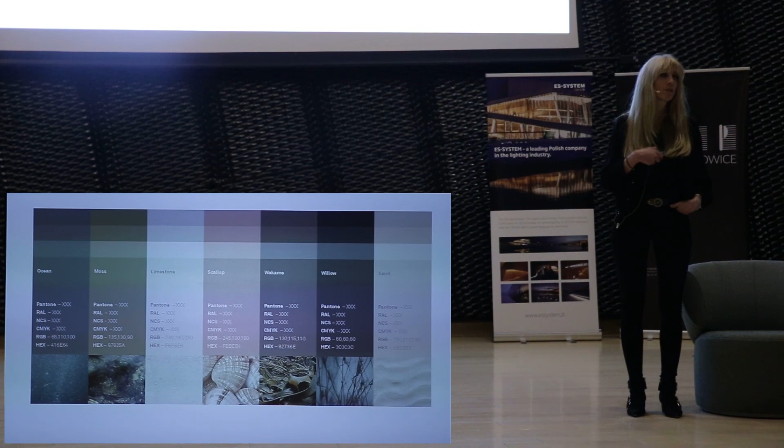And then for that project we also had the possibility, as I told you, for the visual identity - we worked also with all the graphic design and the color palette, which had a direct link to the interior and also the menu, the branding, and the website of the project. So that's part here from our brand design work, and also the logo.

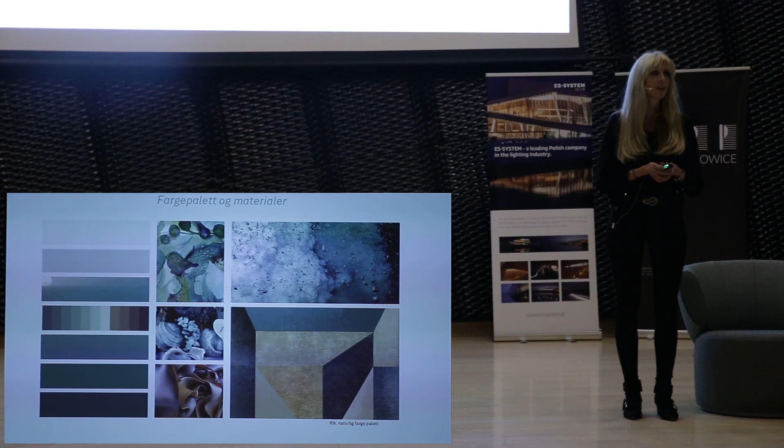We also developed a font for this project - how the logo, the name, the graphics and the communication part of the project are reflected in the material. That's actually the way we love to work, when we're allowed to have this holistic approach to our project, when we can also think about the visual identity and communication part of architecture, which is a very important part. I think it's also a very underestimated part of our profession, because it's very much about how you speak about your project, how you're able to communicate them.

And you see also here some materials from the interior, how we try to reflect on this 'Under' and maritime part. And here are some visualizations from underwater.